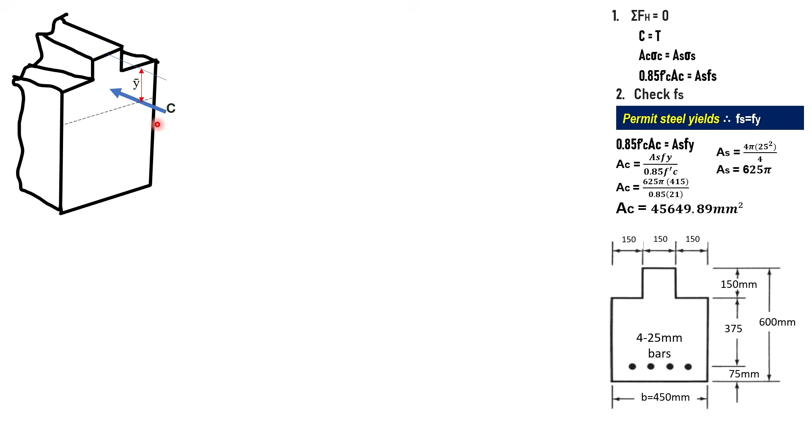That's the goal. So, para mas ma-imagine mo rin, gawin natin yung cross-section. So, ito yung area 1, ito yung area 2. Diyan yung z, yung height ng area 2, and overall width. Tapos itong 150 by 150. So, ito yung y bar. Yan, a. So, ano na re-realize mo? Paano makuha yung centroid y bar?